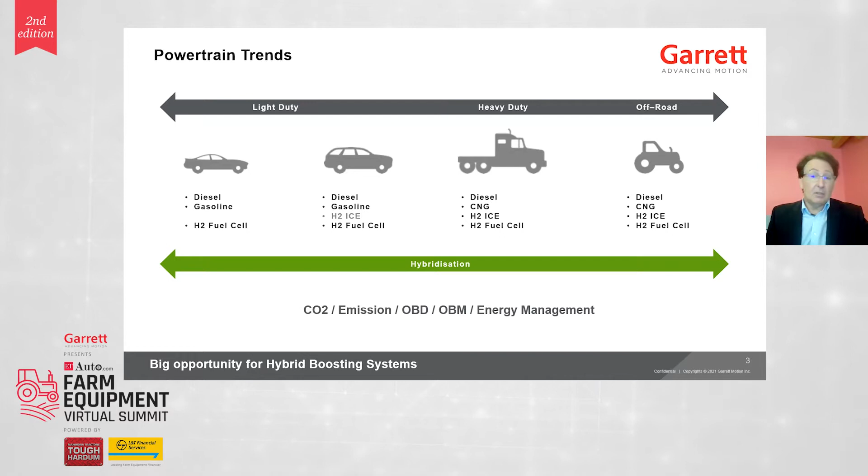So with this as a backdrop, it's a big opportunity for hybridized boosting, and that's the topic of the discussion today. Garrett, it won't surprise you to know, is involved already in many forms of hybrid boosting.

We have, since 2016, in series production, a hydrogen fuel cell compressor on the Honda Clarity vehicle. Now, this is a powerful machine.

Branching out from this, we've now developed a range of electric compressors for internal combustion engines and electric turbochargers for internal combustion engines. So in the press in the next few days, few weeks, you will hear about the series launch of the world's first electric turbocharger, or at least the first high volume electric turbocharger.

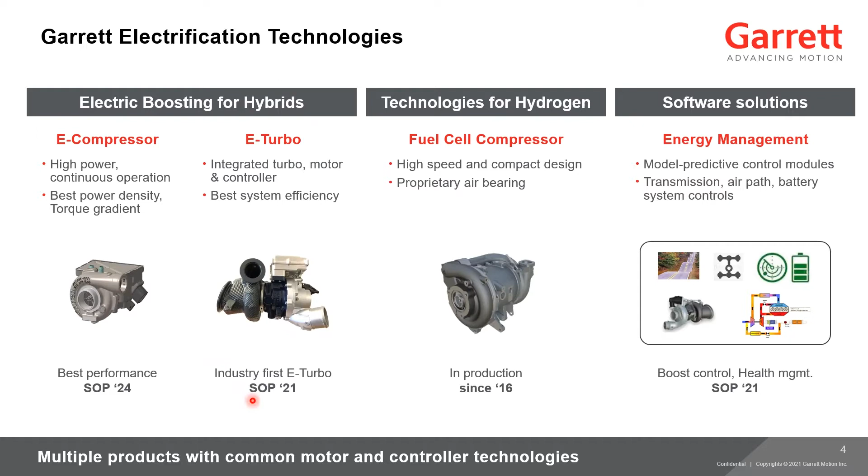Of course, this is in racing today. For those of you who have watched a Formula One race, the series is once again hybridized. And in our case, we support the Formula One teams, actually Ferrari, in their efforts to win that championship.

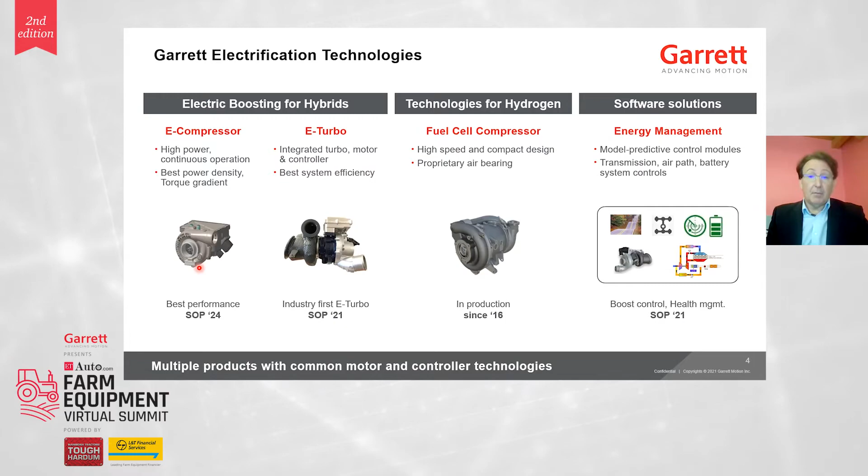I will speak to you about both of these technologies today, and I'll try and bring it to the relevance of how it may help you in farming machinery. So let's talk about the electric boosting opportunities that we have in internal combustion engines.

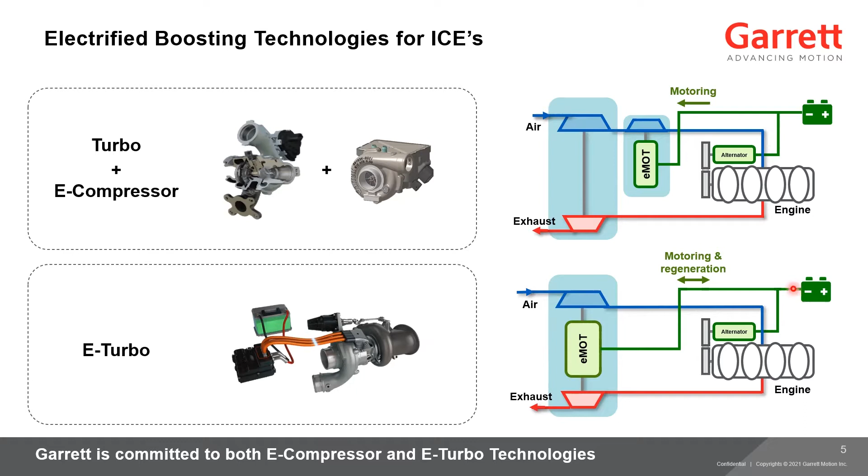We have essentially two systems that we can deploy. One is a turbocharger combined with an electric compressor, and you can see that they're piped together on the engine system like this. The second, we can take the electric element of the compressor and we can integrate it into the electric turbo. And then we go back to a similar arrangement to a standard turbocharger on an engine, but here we're just connected with the electrical network onto the turbocharger as well.

What do these systems bring in functionality? Well, they bring a lot, some of which is common between the two of them, but all of which is additional to a regular turbocharger. First of all, we're able to think about downsizing. In a 6-cylinder world, we can think about downsizing to 4 cylinders. In a 4-cylinder world, we can think about doing the same duty with the engine with just 3 cylinders. And this is something that you may be interested in.

Through downsizing the engine, we have an immediate improvement in fuel economy. We run the engine at more optimum loads and higher brake thermal efficiency. We have systems which are much more spontaneous, much faster in response, and as such we can run EGR during transients, and we can reduce NOx significantly.

In on-highway applications, we can also boost during the braking cycle. Perhaps not so relevant for a tractor, but what is relevant for a tractor is we can go into the world of energy management and thermal management.

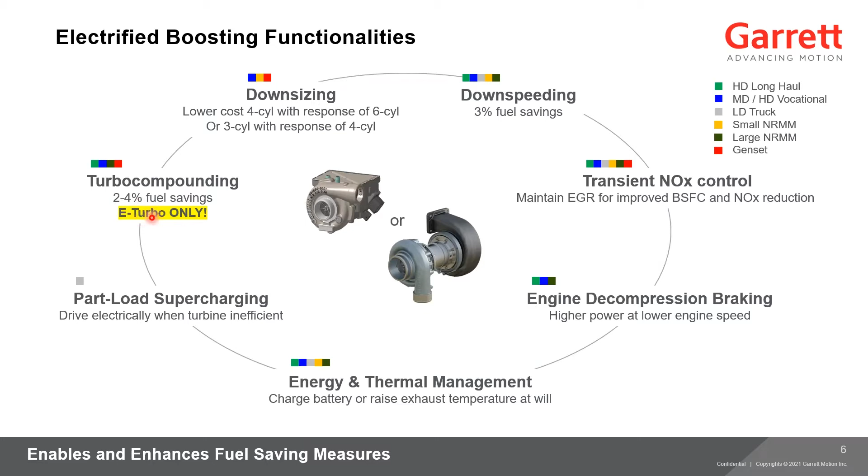One of the other features we have is part load supercharging, and the unique feature of the e-turbocharger is that we're able to do turbo compounding or recuperation or regeneration. People use different words for it, but it brings additional fuel savings when we run the turbocharger in generator mode. This is something that only the e-turbo can do, and it's the thing that differentiates e-turbo from e-compressor. Otherwise, they're very similar.

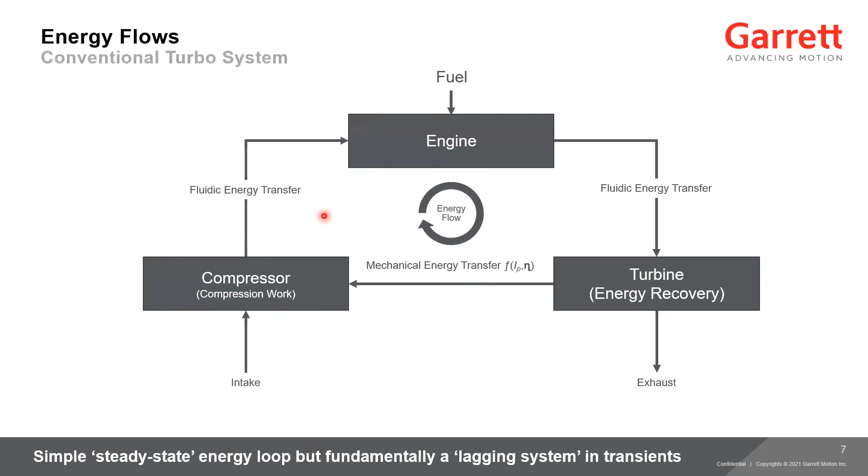Let's talk about the energy flows in the system. Here I've simplified the diagram. We have the engine, we have the turbine, we have the compressor. Generally, the energy flows in a clockwise direction, and we push air from, or we draw air from the atmosphere and we push it into the engine. We fuel the engine, we extract waste heat from the exhaust, and that drives the compressor. And that is a cycle which in steady state reaches an equilibrium.

The turbine work essentially equals the compressor demand. Then we pass the exhaust to the after treatment system and to the outside world. So of course we have to have good aerodynamics, low friction, and good efficiency. But how does it actually work in a transient?

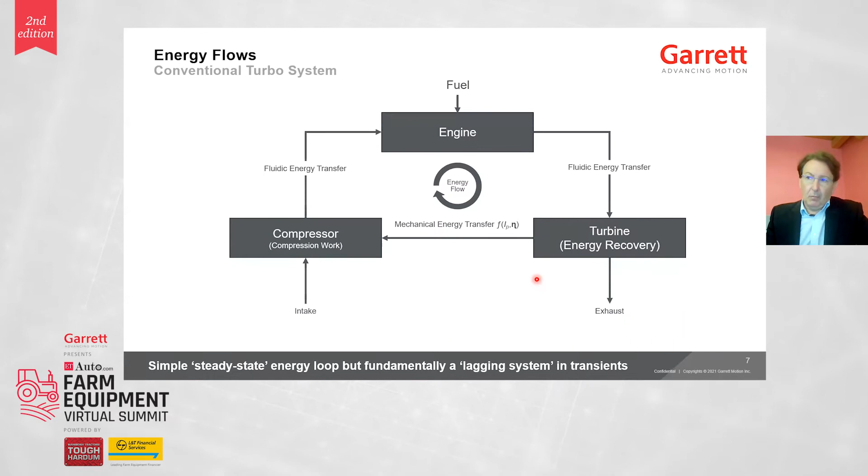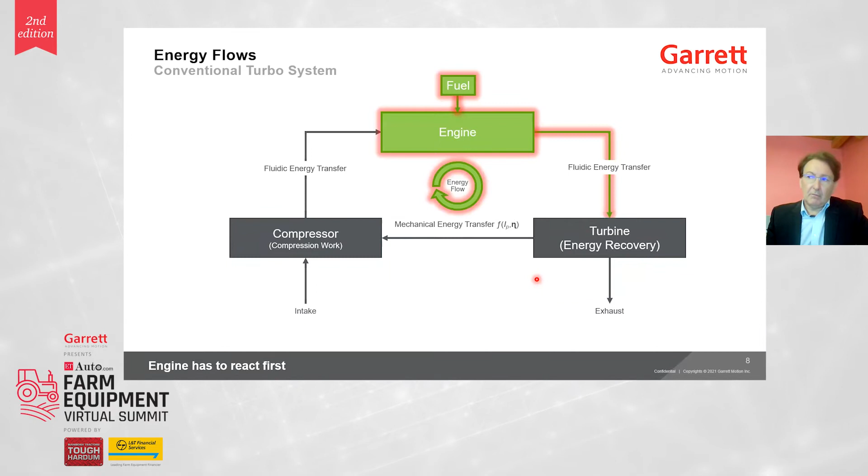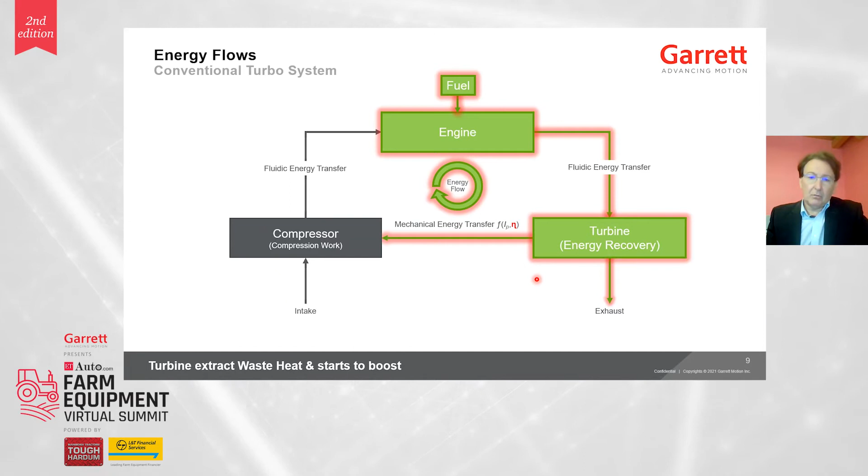The first thing you do when you ask the engine to go on load is give it some fuel. The second thing that happens is the turbine starts to see the increase in enthalpy in the exhaust, and it can start to expand the exhaust and produce useful work. Only then can it accelerate the compressor, and only then can the compressor give the engine the air, or more specifically the oxygen, that it's looking for to burn the fuel.

So the issue with this system is that it's fundamentally a lagging system. And it means that in tractors, we use 6-cylinder engines instead of 4, and 4-cylinder engines instead of 3, just so that we can get the load acceptance and the pickup that we need when you start working with these machines.

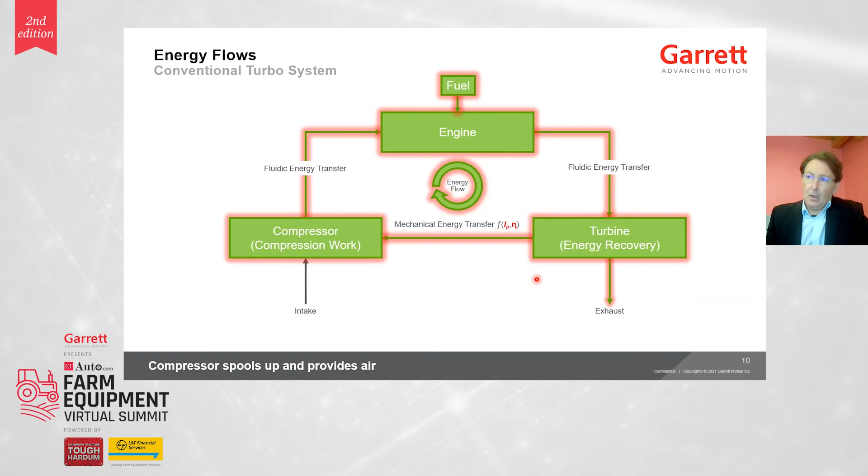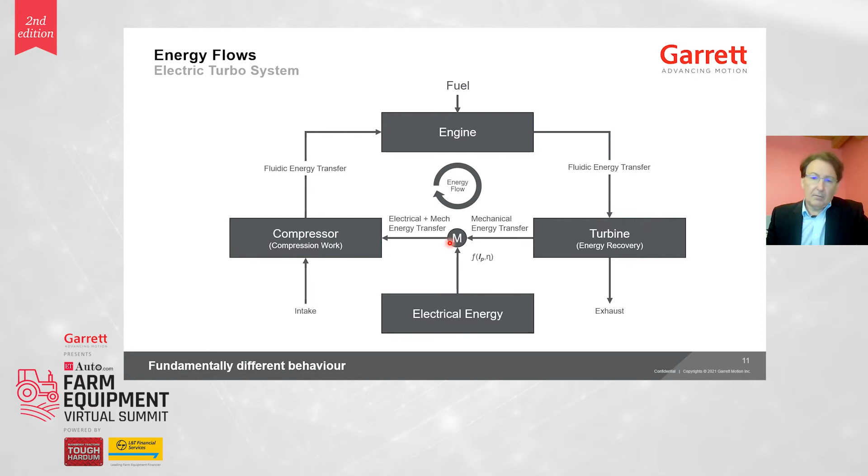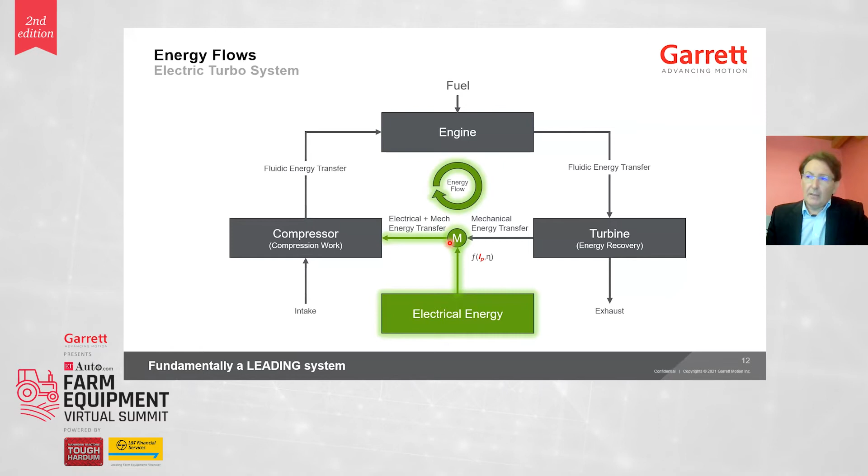If we now consider the e-turbo case, and we insert an electric motor onto the shaft of the turbocharger, the whole dynamic of the system changes quite significantly. The electrical energy from the vehicle electrical network can be used directly to energize the turbocharger motor. That motor only has to overcome the inertia of the rotating group, and it starts to accelerate very quickly and produce useful work. At that point, the engine can also inject fuel and react, and it has the oxygen it requires to perform its combustion immediately.

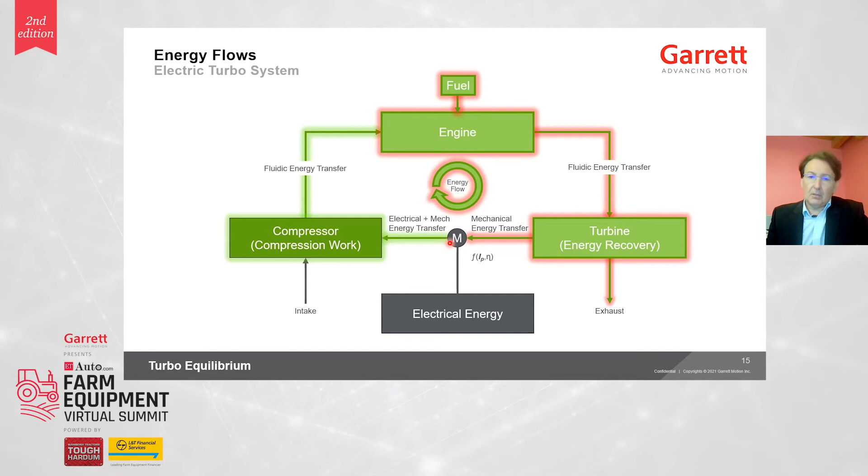What happens next is interesting, because the turbine obviously starts to generate useful work. It starts to do its expansion and recover waste heat. And what happens is we reach an equilibrium when we're able to turn off the motor, and we're back to the original quasi-steady state cycle that we were talking about a few minutes ago.

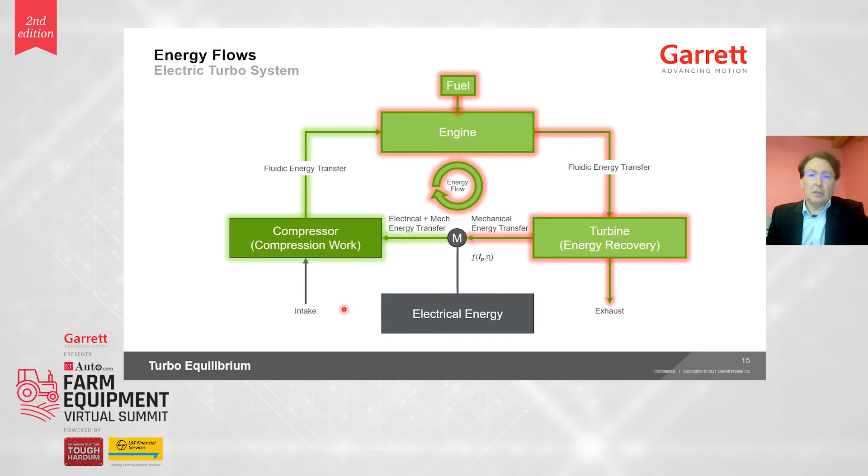But what happens if we continue? What happens if there's more exhaust enthalpy than we actually need to drive the compressor? What happens if the engine were fueled just a little bit more? Well, what would happen is that the motor would become a generator. We don't want the turbocharger to rotate any faster, we don't need any more air in the engine, so we actually start to brake the turbine with the electrical machine.

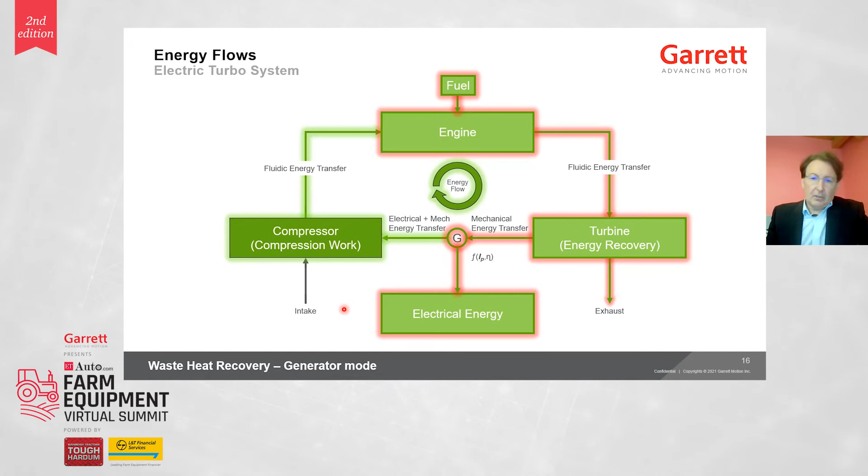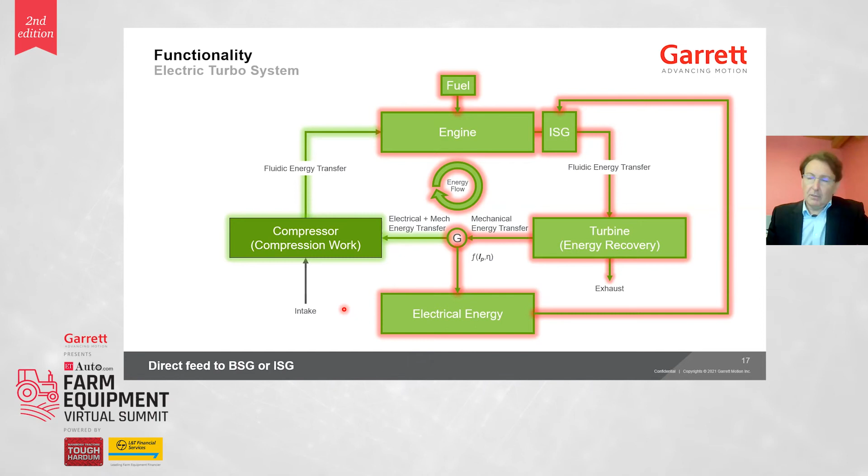Of course, the electricity has to go somewhere. So where do we put it? Well, we put it back into the hybridized powertrain. In this case, I've shown an ISG just schematically connected to the engine. It could be a belt starter generator as well, or another part of the vehicle electrical network. Of course, we have a battery there, which maintains the voltages and everything else on the network.

What's really interesting at this point is the next step: we start to think about the motor on the e-turbo not just as a motor and not just as a generator, but one which is constantly changing between motor and generator. And at this point, we get into the concept of bidirectional energy management, managing this in the time domain so that there are times where it's a good idea to use it as a motor, times where it's a generator, and we start to manage the state of charge within the whole vehicle electrical network.

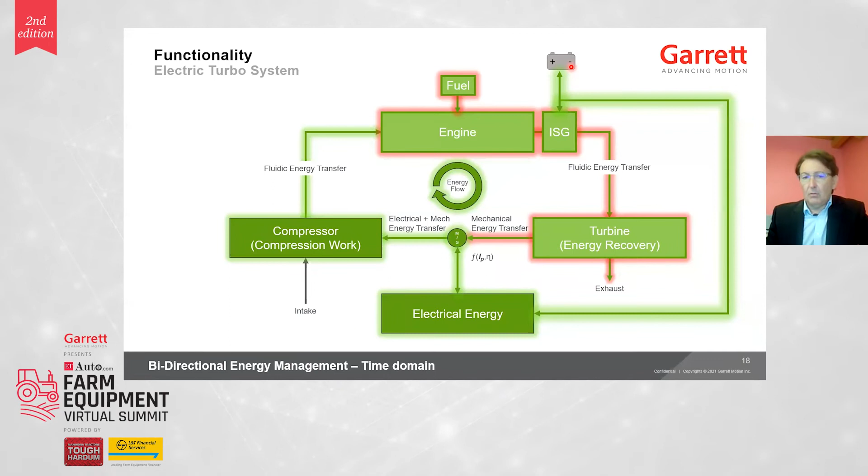So these are the functionalities that electric boosting can bring. I use the turbo example because it's the one that goes the furthest with this concept of energy management. The electric compressor can do that also.

Going on to the next step, we start to think about how much energy we can save. Well, in one of the earlier slides, we said 3% in fuel economy, and this is on top of any downsizing effect.

In this schematic, we have exhaust enthalpy being converted via the motor through the power electronics and back to the electrical machine on the crankshaft. This allows you to defuel the engine. If you put in 10 or 15 kilowatts through this route, from energy that's been recovered in the exhaust, then that's 10 or 15 kilowatts that you do not need to produce with the engine itself. So you're actually defueling the engine in order to produce this power.

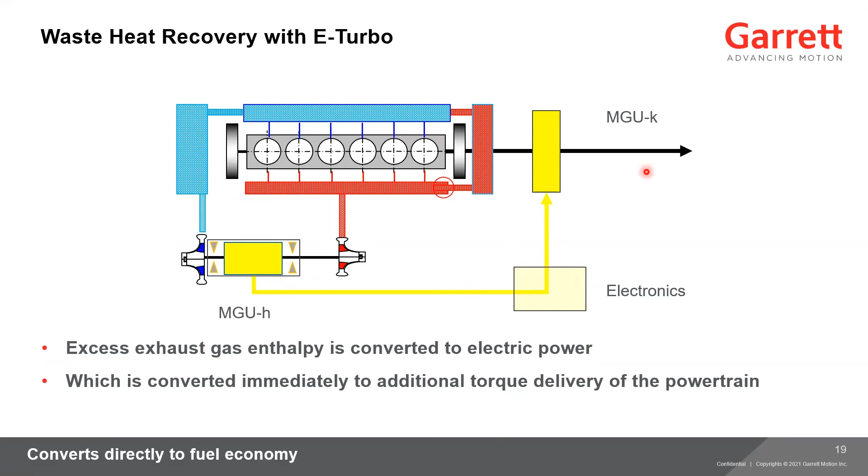You can think of it as an EGR device. Many of the turbochargers we supply in the world are variable geometry. What happens in exactly the same setup, but on an EGR engine, is we're able to start thinking about the variable geometry turbine controlling the P3, the pre-turbine pressure, and essentially driving the EGR loop.

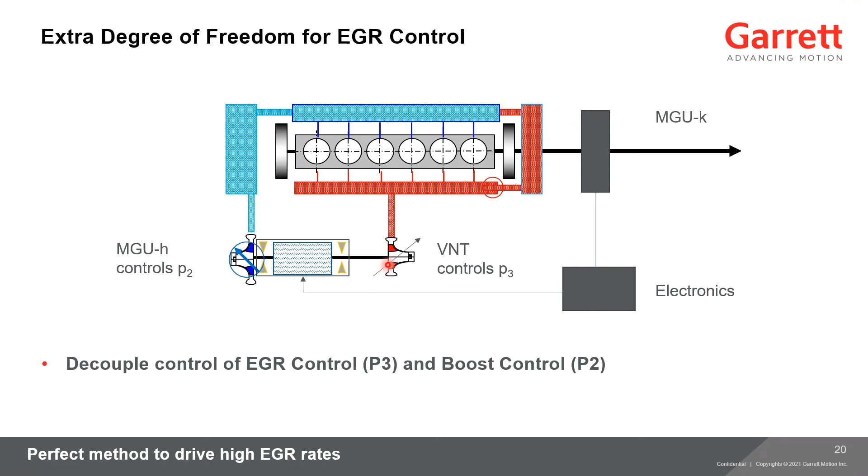This drives the pressure differential that pushes EGR back into the cylinders, and that becomes your EGR control parameter. Of course, that takes away enthalpy and power from the turbine shaft, but we don't mind because we can add power on the motor now. So we go to the situation where the VNT is controlling the EGR and the motor on the shaft is controlling the boost pressure. We can boost as much as we like with the motor, and it doesn't matter that maybe we don't have enough enthalpy on the turbine.

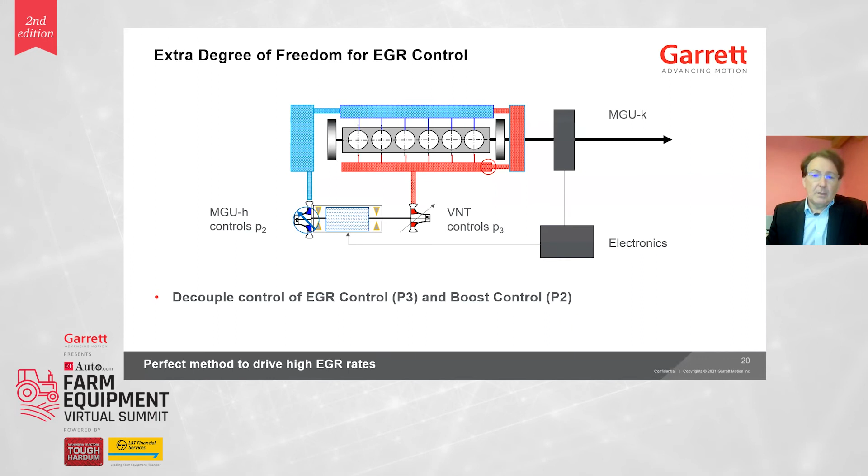Another function we can put it to is aftertreatment thermal management. This is reasonably complex, but there are several features in this type of arrangement. First of all, we have a bypass around the turbine. We can position the bypass to set the P3 here, and we can play unexpanded exhaust directly onto the aftertreatment system with the proper geometry and design.

Of course, this takes away flow from the turbine, power that we could extract from the exhaust, but again that doesn't matter. If we have the MGUK and the MGUH, we can take power from the engine crankshaft, convert it electrically to power on the turbocharger shaft, and boost. Positioning the valve correctly and sizing the turbine correctly allows us to control the flow of EGR.

So in the warm-up stage of the engine, we can recirculate EGR. We can play unexpanded gas directly onto the aftertreatment system, and we're putting the engine under higher load because we're actually boosting from the engine - we're supercharging. So the combined effect is the engine comes onto high load, we recirculate hot gas, and we play hot gas onto the aftertreatment system, and you get to catalyst light-off much faster than you would otherwise.

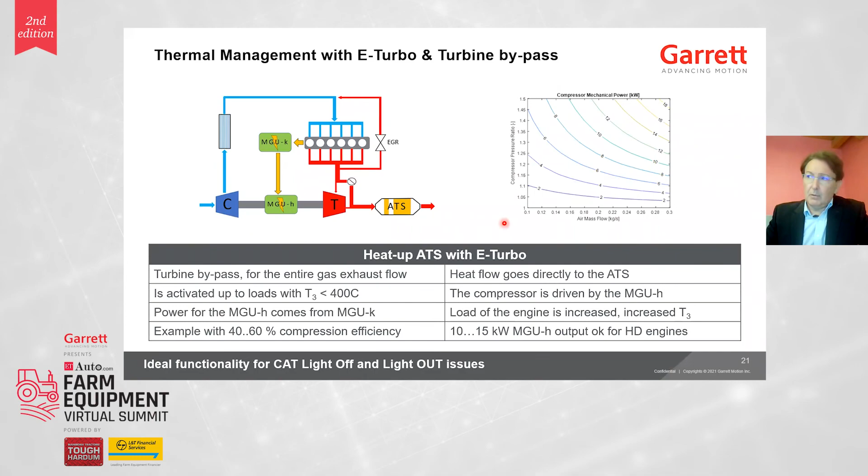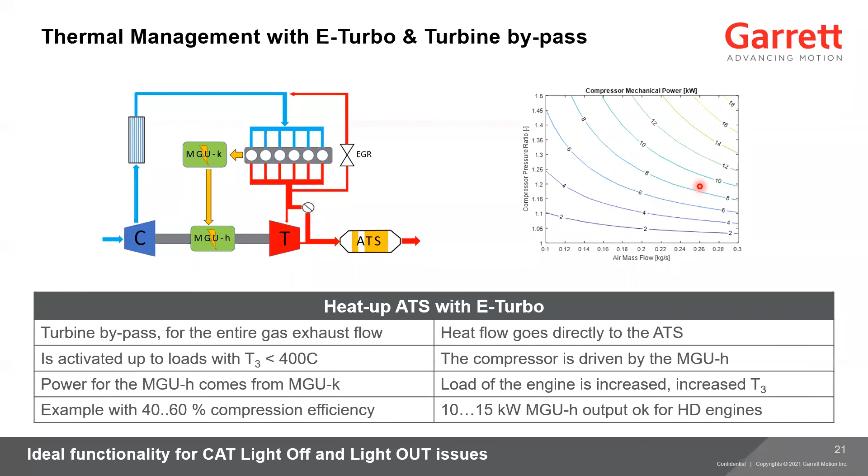So if we do some calculations looking at the flows and pressures we require, 10 kilowatts takes us very easily to a 1.4 pressure ratio and maybe 180 grams per second of airflow. You can pick off points on this kind of chart as to where you want to run in your warm-up cycle. But this is a very effective method of thermal management.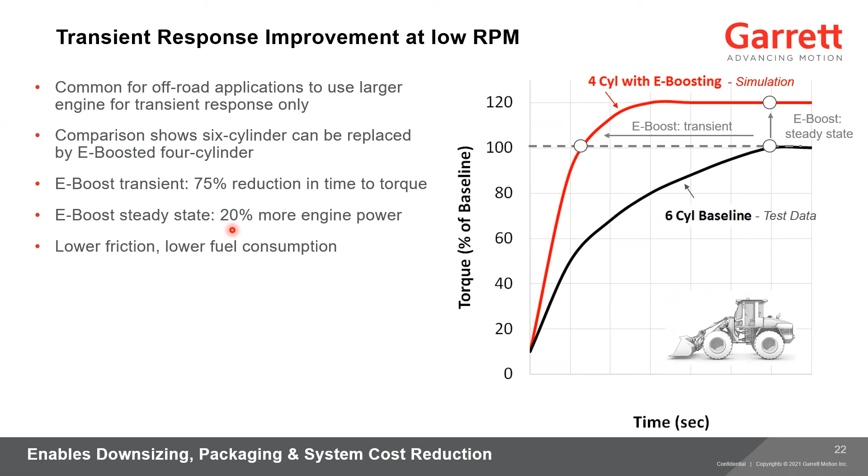This data is normalized, but it's based on test results that we've made. And what we can see is a 75% reduction in time to torque. If we configure the systems correctly, we can give up to 20% more engine power as well. The advantages a four-cylinder has over a six-cylinder is, of course, lower friction, lower cost, and because you're operating it closer to its peak efficiency, lower fuel consumption.

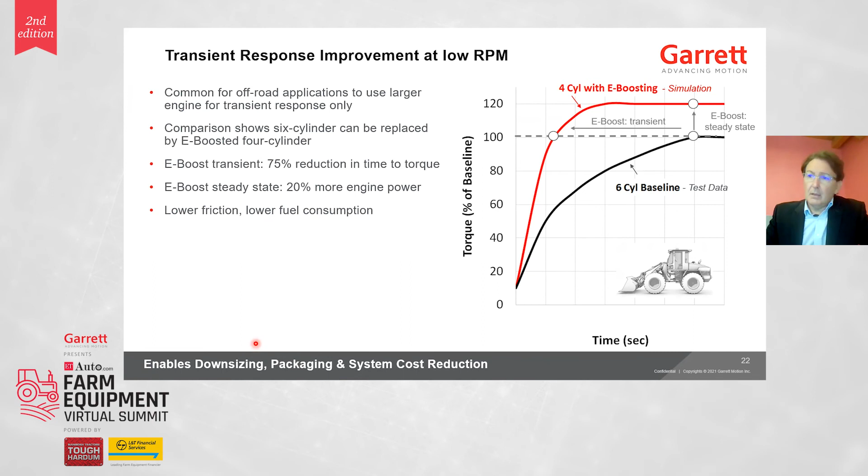So in the world of off-highway, I think there's a lot of value created by the fact that you can once again consider downsizing, because you've got benefits in fuel economy, benefits in packaging, which are very important, and benefits in system cost.

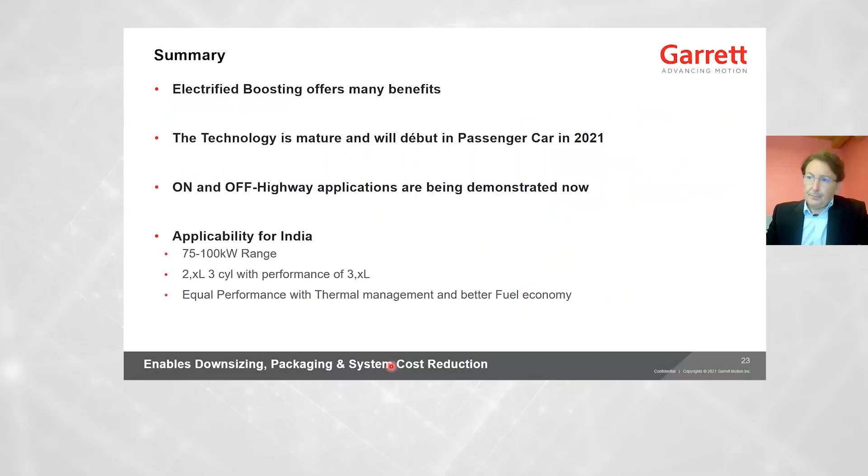With that, I'd like to summarize my presentation. Electric boosting offers many benefits. Contrary to popular belief, this is not only Formula One technology. This is not something for the future. This will debut in passenger cars in my part of the world in 2021. We are literally days away from launching series production of electric turbochargers.

Electric compressors will follow in 2024, and we'll be applying them through demonstration projects in the coming months to both on and off highway applications. Specifically for India, we think of the 75 to 100 kilowatt range of machinery that you use in agriculture.

As a problem statement, one that looks very attractive to me is considering you use a lot of 2.x three-cylinder engines today, but they're limited in power density, so you use a 3-liter instead. I wonder what an electric boosting system could mean for you if, in the future, you consider downsizing this 3-liter to a 2.x with one cylinder less - much less friction, higher loads, better thermal efficiency, and a system that can help you meet the emissions challenges of the future.

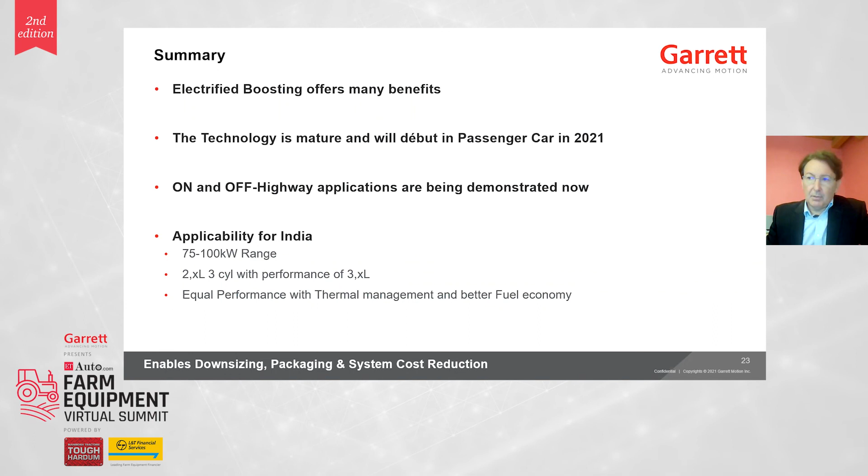With that, I'd like to close my presentation, and I'm more than happy to take questions about the technology or anything else you might raise about Garrett. So thank you very much.